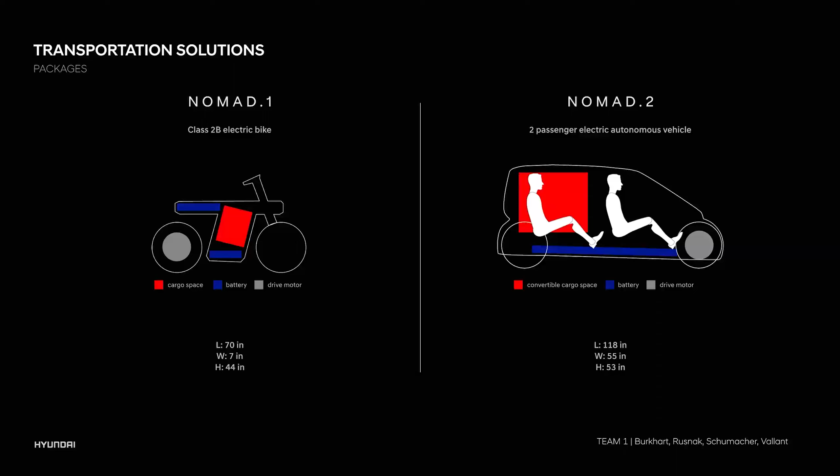This is the package overview for each mobility solution. The bike is intended for shorter range usage with the most freedom of destinations, with an available storage compartment for smaller items. The microcar, though, gives a longer battery range for driving, with available space for up to 2 people or optionally 1 person and extra storage space in the rear.

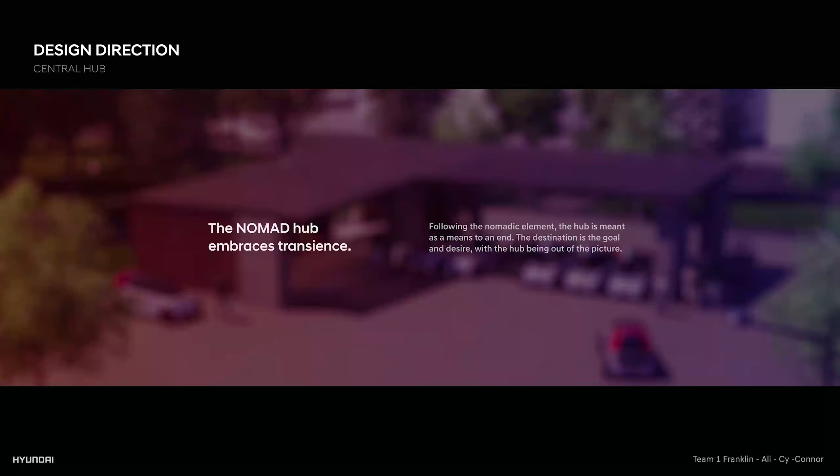The first element we'll be covering today is the hub. It is located on the corner of Burnett Woods, and it serves as an efficient stop-and-go location for users. With this in mind, we decided to keep the hub aesthetic minimal, and these are some visuals that represent inspiration that was later used for ideation.

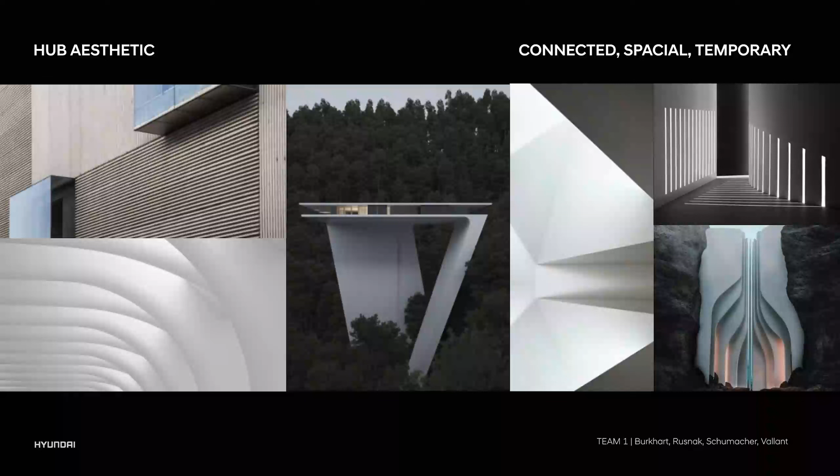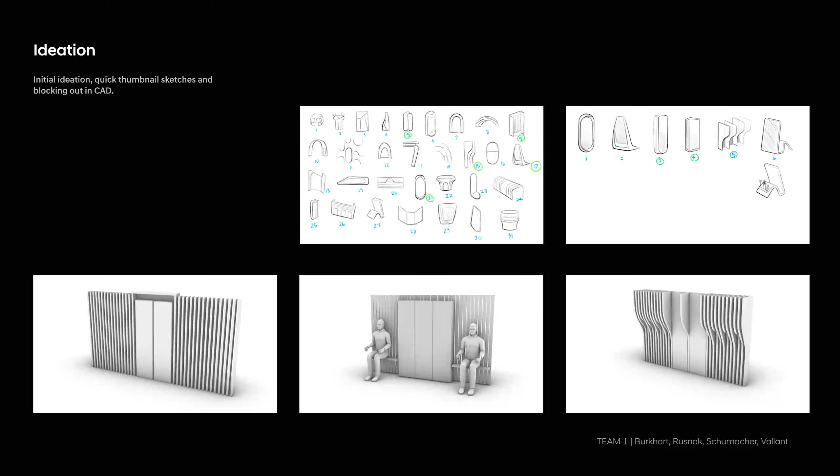To begin ideation, I started off with quick thumbnails of what the ordering kiosk could look like, and then CAD ideation was utilized in the beginning as well to understand the scale of products that were going to go in the hub. From there, I moved into CAD and I started adding elements into the building such as the vehicles,

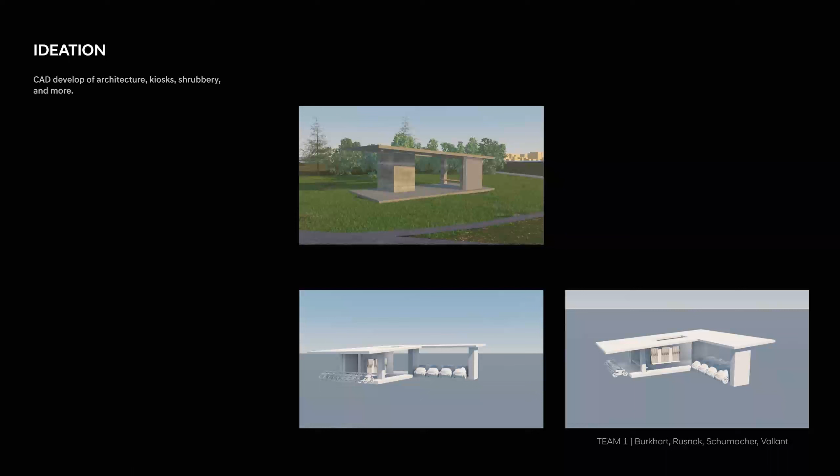bikes, and ordering kiosks. We kept in mind the minimal aesthetic we were going for, as the purpose of the hub is an easy to understand stop-and-go center.

Our final hub is located on the corner of Burnett, and it houses 6 vehicles and 12 bikes under the pavilion area.

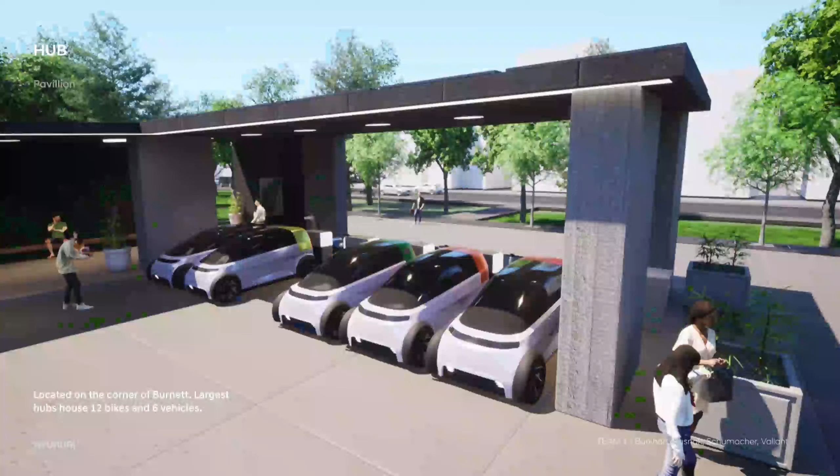When the vehicles need to be charged, they back into the charging bank, while the bikes dock into wireless charging areas on the other side.

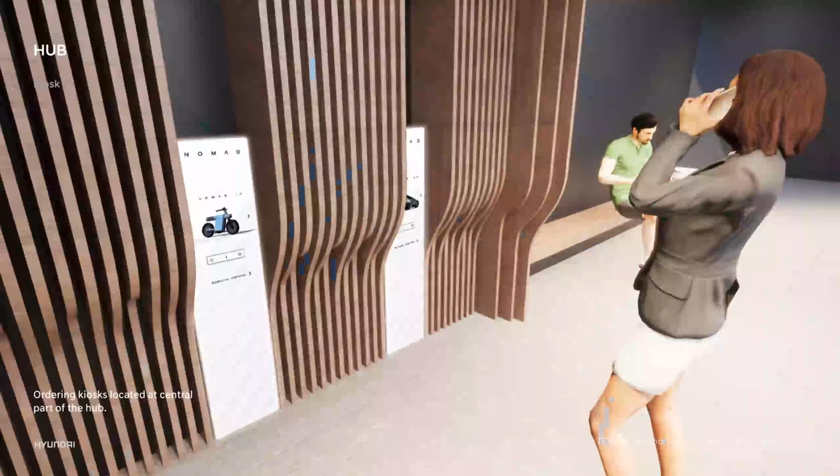There are also 4 ordering kiosks located at the central heart of the hub, giving users the ability to easily order their mobility solution.

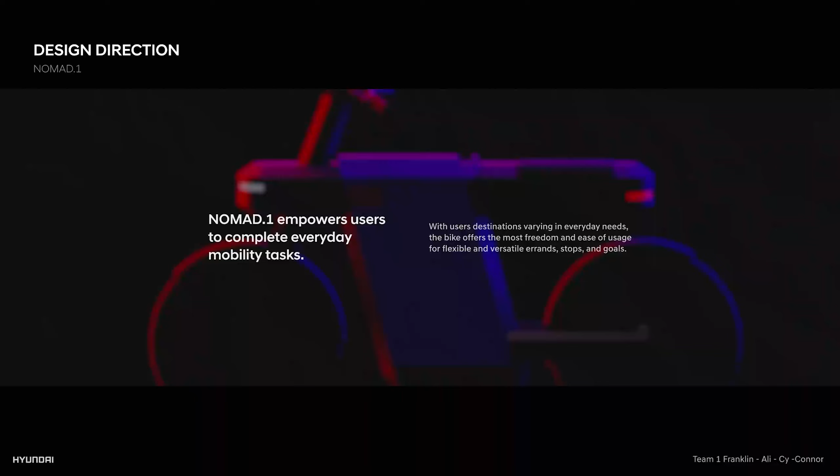The next part of the system is the Nomad One. The goal of the Nomad One is to empower users in their everyday tasks. We understand that every usage and need is a little different, so we wanted to create a smaller mobility solution that would offer the most freedom of usage.

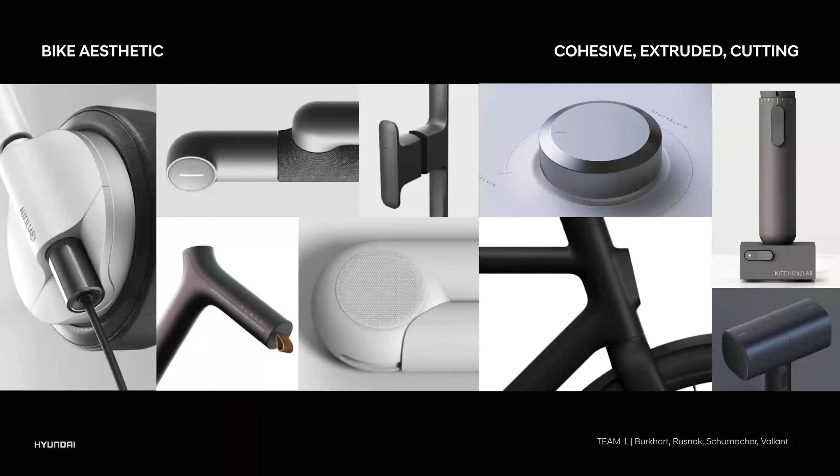When approaching what the aesthetic of the bike should be, we identified 3 keywords: cohesive, extruded, and cutting. The aesthetic of the bike feels whole and connected in a volumetric manner, but embraces a future vision of cutting-edge style and demeanor. Starting with simple thumbnails, we wanted the bike to be visually uncomplicated yet intriguing in its own way.

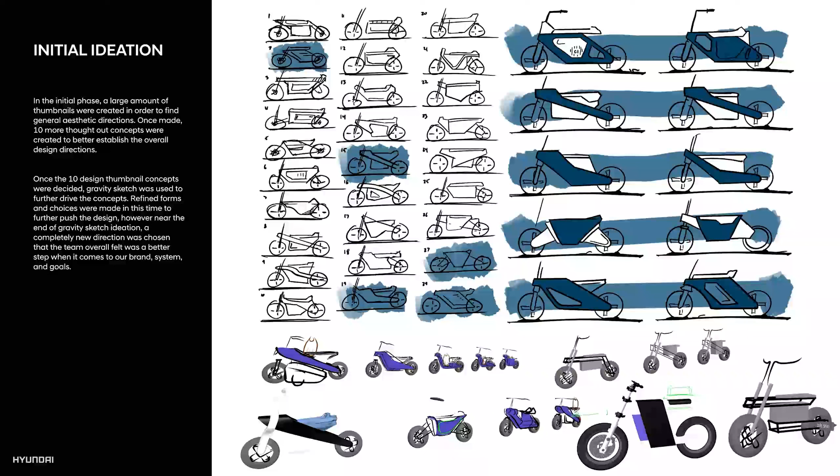So many of the forms were reduced, yet embraced certain intriguing features for each sketch. After this, we moved into Gravity Sketch to further understand what the bike would look like proportionately, which helped immensely in deciding the final direction the form would take. From here, the bike was taken into CAD so that thorough details and features could be ensured, and through the process of establishing all of the form, many models and ideations were made.

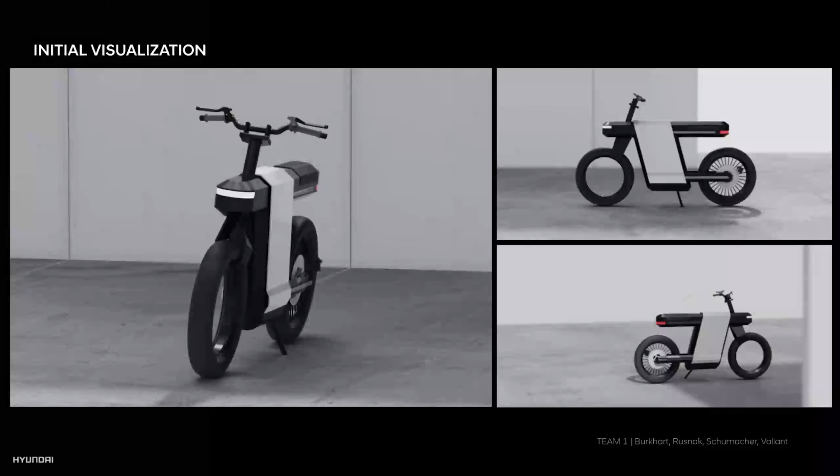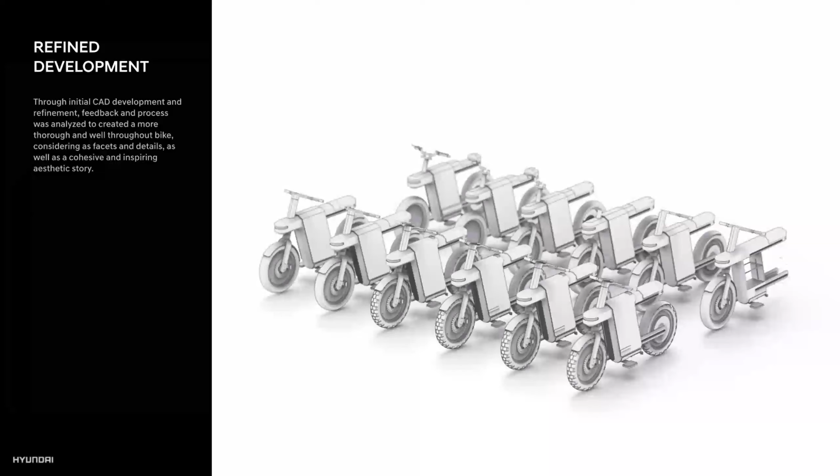Initially, the bike was to be clean and minimal in color and appearance, being modern and intriguing, yet there was more to be established and considered in making the final iteration of the Nomad One. Once again, the Nomad One was brought into CAD, where over time final details and features were decided on and brought into visualization. This is the first look at Nomad One, a community e-bike for empowering the public in their destinations, errands, and goals.

When considering the dimensions of the bike, we wanted a shape that could be used by all people, being only 34 inches high with the seat and 7 inches wide, being compact yet spacious for riding.

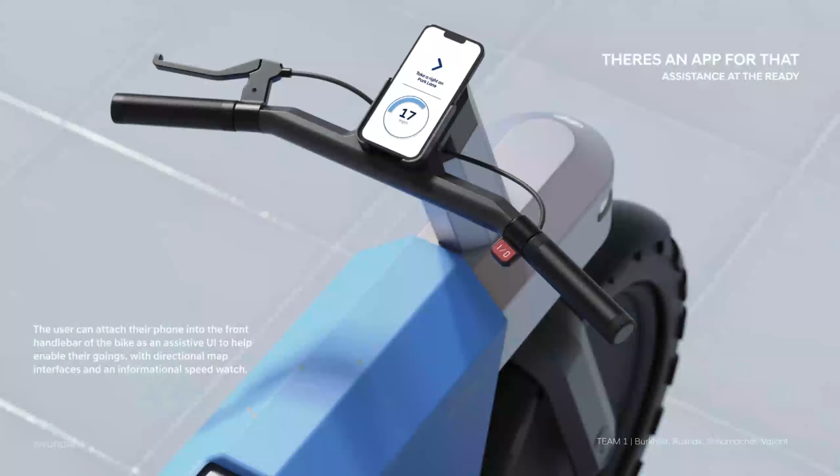The usage of Nomad 1 is very comprehensive and easy to use. With a simple front wheel brake and right grip acceleration on the handlebar of the bike, riders can optionally attach their phones to better assist their riding and navigation.

On the inside of the bike, the center console can be slid back onto controlled rails, where the user can access a storage space with modular retractable bags that can be folded up for various items to be put in.

The front fork of the bike has built-in induction charging coils where the bike can be docked into the hub. Nomad can wirelessly charge smoothly.

The app provided to users can give further personality and empowerment for each person to personalize their color preference of the center console. This is done through e-ink, which is a lower power consumption display technology.

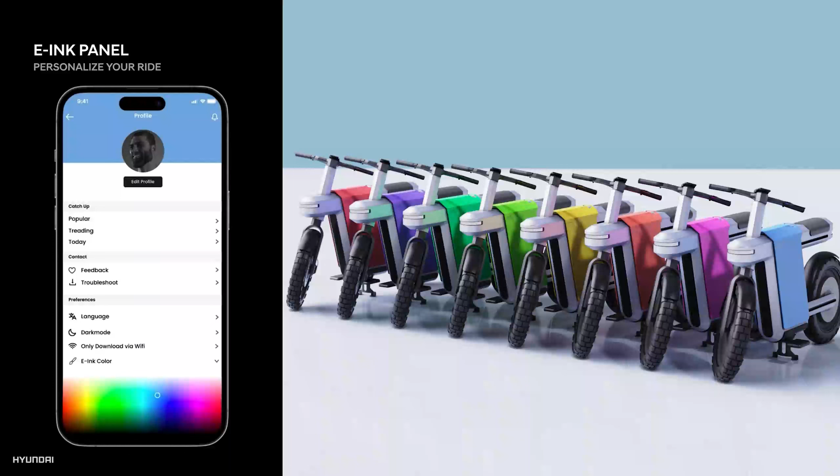In wanting the form to feel cohesive and whole, we decided to build the suspension into the wheels for a smooth and safe ride while not having to compromise the form.

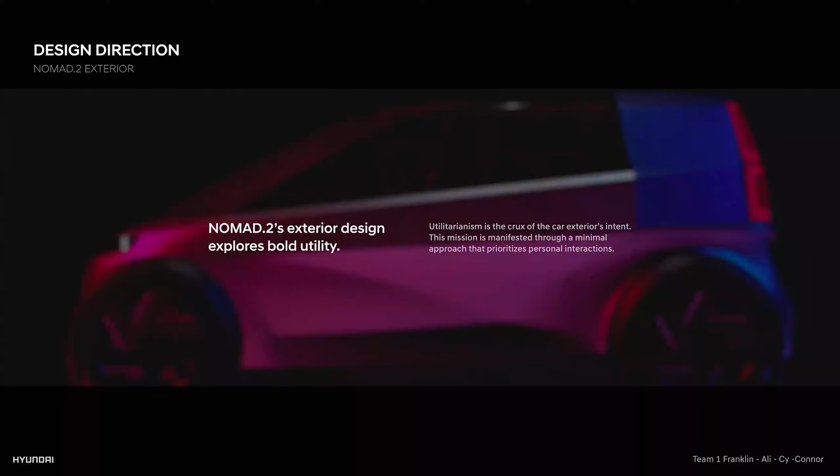Now we'll be moving into the exterior design of the Nomad 2. Nomad 2's exterior design explores bold utility. The goal was to develop a utilitarian design that is intentionally expressive.

When beginning the design process for Nomad 2, we developed a mood board and identified keywords to define the theme. The contrast of precision and playfulness speaks to the goal of creating an expressive yet utility-focused design. Stark is rooted in Hyundai's bold, sharp design language.

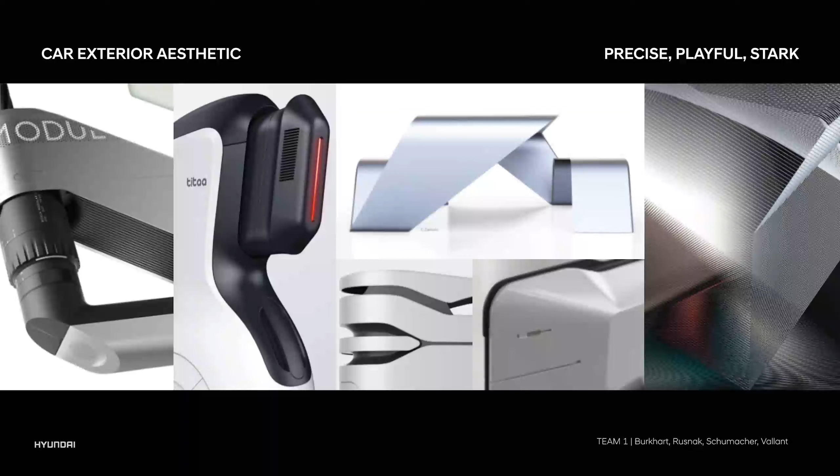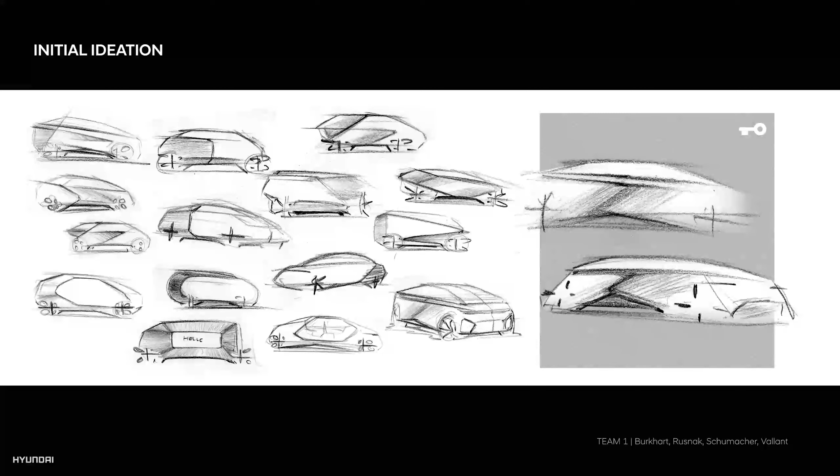Initial ideation revealed a pinching, flexing theme as a key sketch, a sleek form with intentional and impactful surface changes. Further analog and gravity sketch development saw the validation of surfaces and proportions.

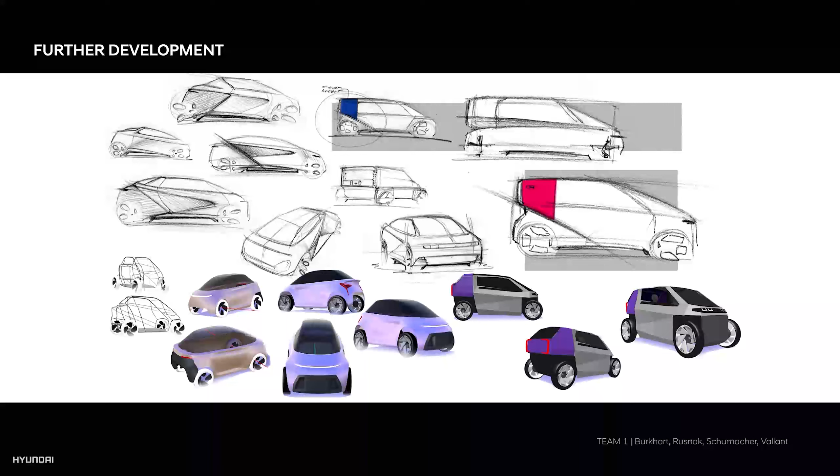The theme became more boxy and utilitarian, while retaining unique surface details. This is the final design theme. From these sketch renders, we moved into Blender, developing the final model of Nomad 2.

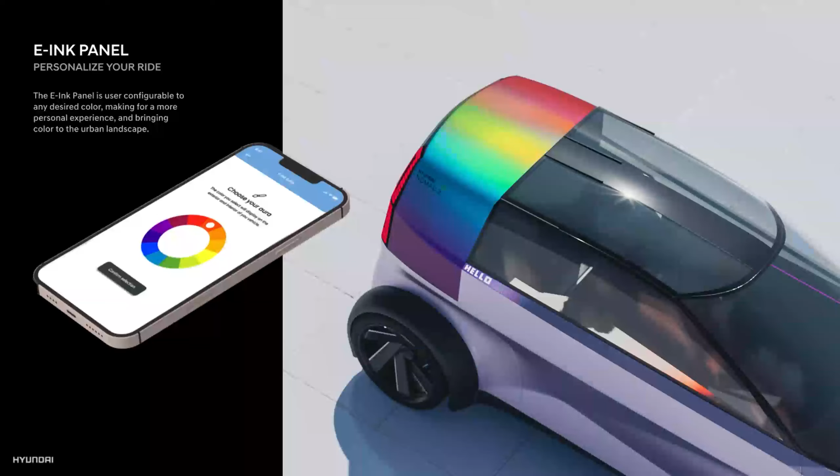The e-ink panel on Nomad 2 is user configurable to any desired color, using the same technology as Nomad 1.

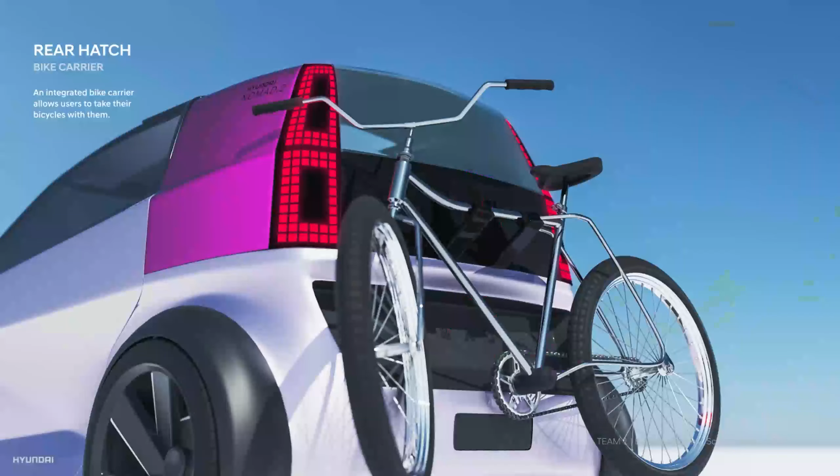The rear hatch opens horizontally at the center of the vehicle, conserving space when it is in use. The rear hatch also features an integrated bike carrier for multimodal adventures.

The door features a touch panel display, greeting the user and allowing re-entry of the vehicle. The doors are gullwing style doors, conserving space during ingress and egress.

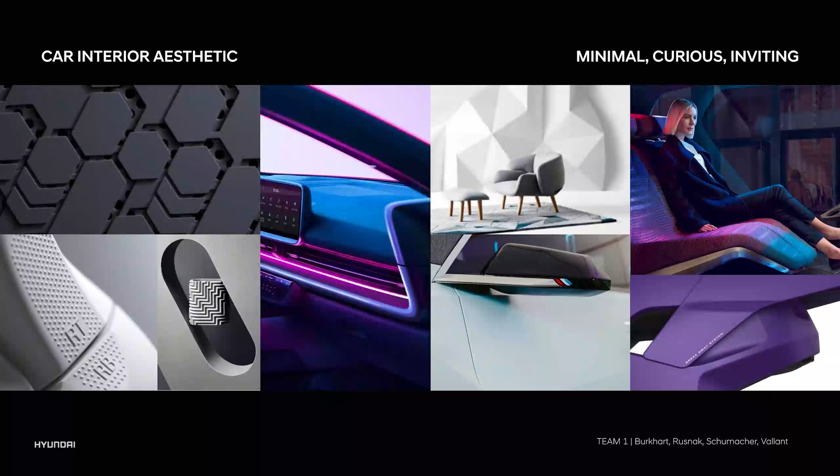We'll now move on to the interior of Nomad 2. The theme of the interior was to provide a modular experience to adapt to our users' range of needs. The aesthetic of the interior was focused around a minimal, curious, yet inviting theme.

This is public transportation, and we wanted it to stay simple and easy to maintain, but provide an exciting experience and have the user be able to personalize it.

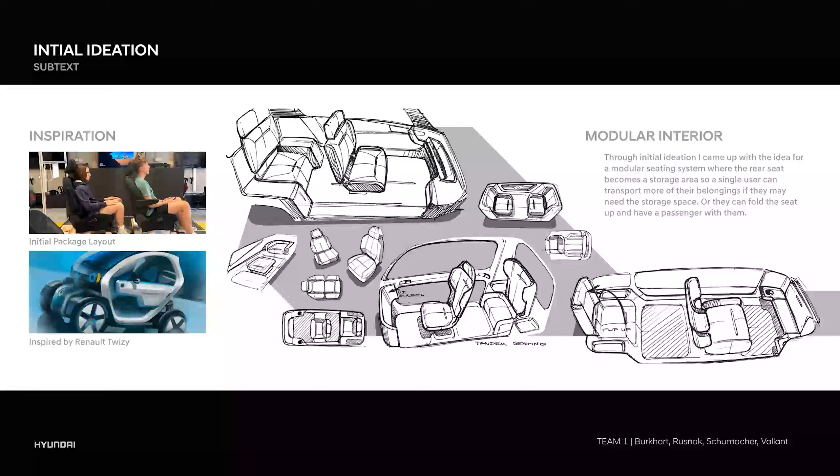In initial ideation, I was inspired by vehicles like the Renault Twizy to create a tandem seating package. In combination with a modular rear seat, this allows the user to configure the vehicle to their needs.

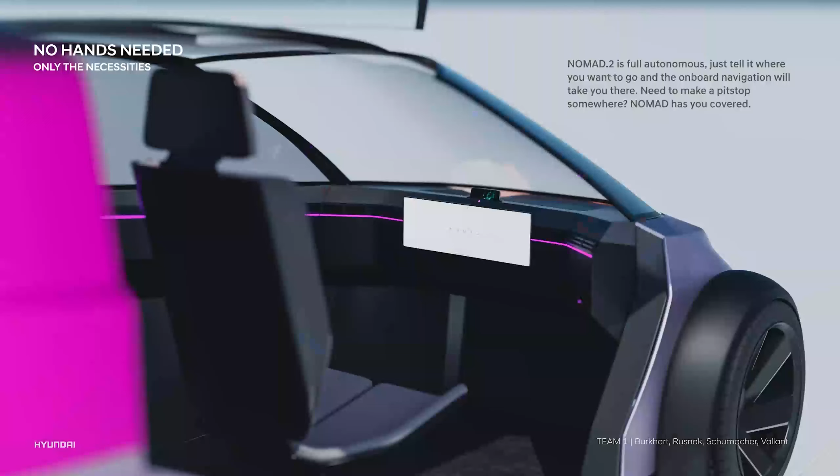Nomad 2's fully autonomous capabilities allow the user to focus on the riding experience. A bring-your-own-device dock allows for seamless integration of personal devices through Apple CarPlay and Android Auto.

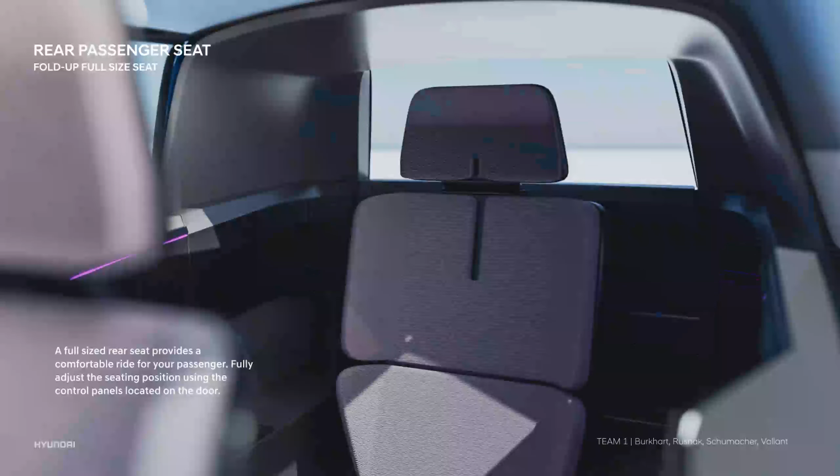A full-size modular rear seat allows for a comfortable rear passenger riding experience, and the seating position can be fully controlled through the rear passenger's control panel located on the door.

The door control panel allows for the rear passenger to also control the riding experience if they need. The rear seat can be folded down to expose a 27 cubic foot storage area that empowers the user to conveniently transport their belongings. This is Team 1.